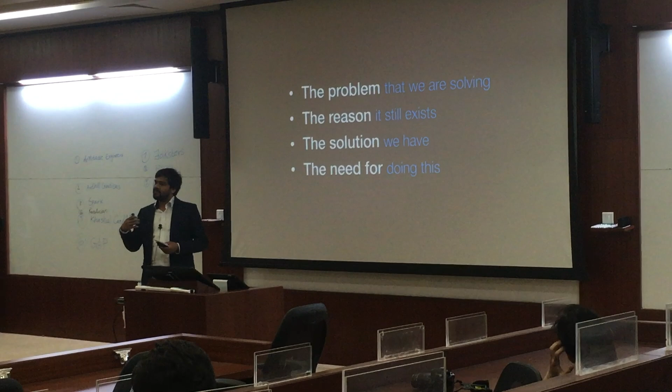So today I'm here to discuss water issues in India and how we are trying to solve it. I'll divide this into 4 sections: the problem that exists and what exactly we are trying to solve, the reason for it to exist and why hasn't anyone else solved it before, the solution that we have, and the need for doing this, and why don't we make an internet firm instead of doing something like this.

So let's start with the problem and why is it this bad. The first category of people we are trying to reach is the kind who don't have access to piped water itself. We take water for granted. Developed countries take pure water for granted. But there's a very large section of India, as much as 1/3 to 2/3 of the rural population, who don't have access to water. They have to go to regular ponds or rivers, which isn't very clean, and which obviously causes diseases. There are a lot of mineral issues, and you have to walk a long distance to get that water.

A lot of times it's students and children who, instead of going to school, basically try to get water, which isn't very cool. This results in a lot of deaths. A lot of children die out of dehydration, because of minerals, or out of diarrhea, which is a very curable disease, but a lot of people get it because of waterborne diseases.

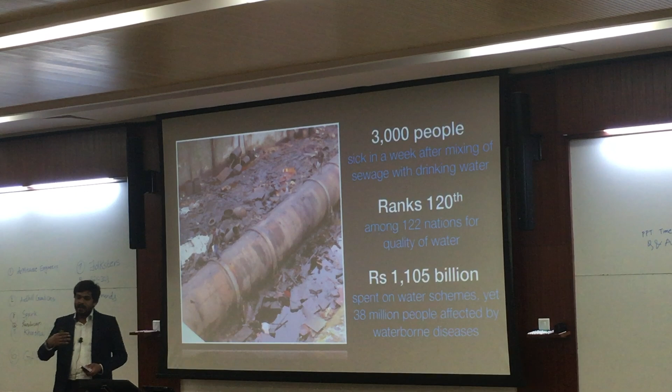But even beyond that, even people like us who have piped water, we also have a problem. If you've ever been to IIT Bombay, there's a pipeline that goes right next to the boys' hostel. If you go there, you can see a lot of cracks on it. There's a lot of sewage water that seeps into the drinking water. And this is not a rare issue, this is a very big problem.

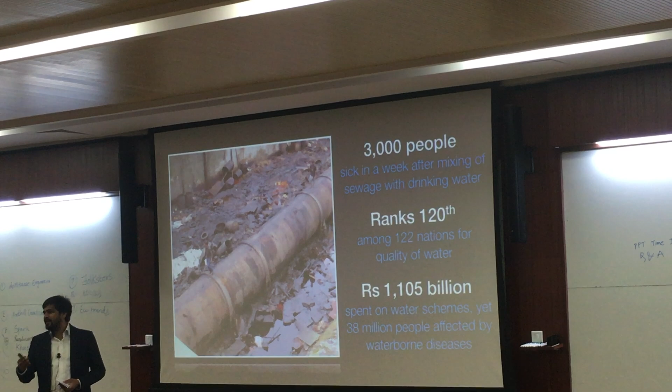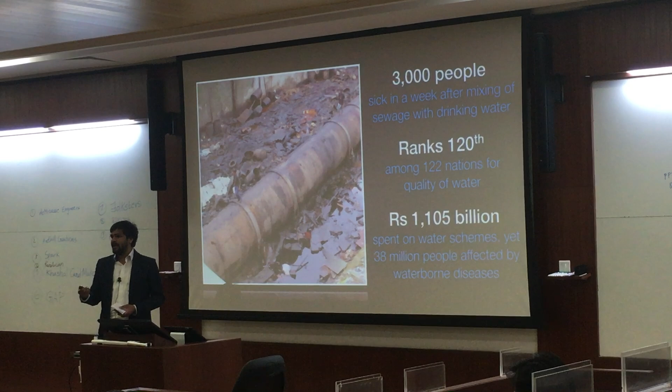In February this year, in Noida, about 3,000 people suddenly fell ill within a week, including children. This was because their drinking water was apparently being mixed with sewage water, and they were forced to drink it for a month. So that is a big problem. Even though we've spent so much money on these kinds of issues, this has existed for many decades now, which is quite shameful.

The third category of people we are focusing on is the drought-affected areas in Maharashtra, in the Latur area, and in Andhra. This is the primary go-to area where we want to start, because Latur, for example, doesn't have water even though it has pipes. That is such a big problem. 29% of the reservoirs don't have water. So that is a big problem.

The reason for this is basically mismanagement. Delhi has the Yamuna and stuff, so there is availability of water. India is very low in availability.

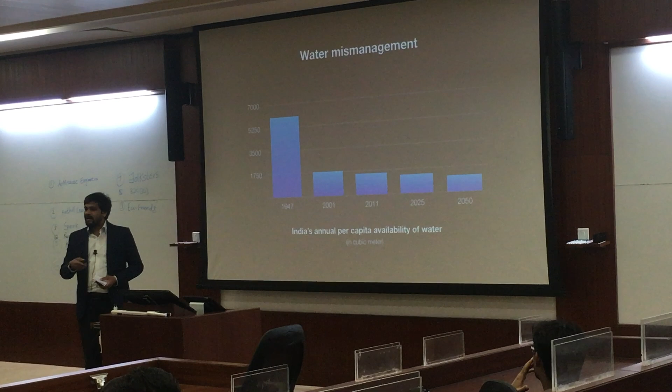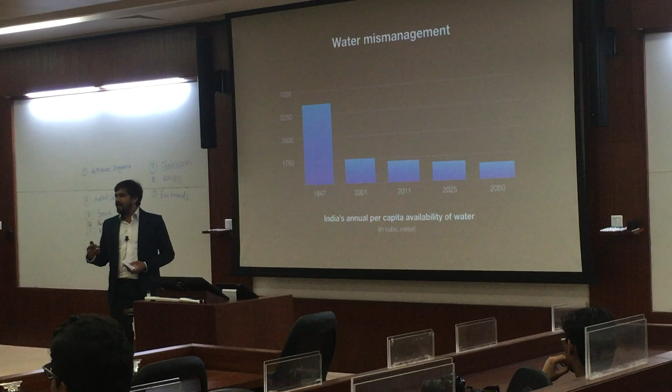After independence, we gave free electricity to farmers, and they started depleting the groundwater very quickly. So unlike other countries, this has gone down, and it's going down very rapidly, which is a bad situation. If we don't have enough water per capita, then obviously it's not a good situation to be in.

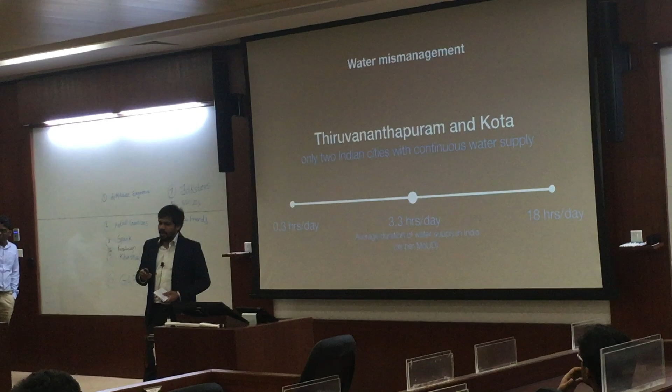In India, there are only 2 cities which have 24/7 water supply. Others, we know, don't get 24/7 - we have only a few hours. In Delhi, for example, there are places where you get water for only 3 hours a day. So we would like to see water being available 24/7.

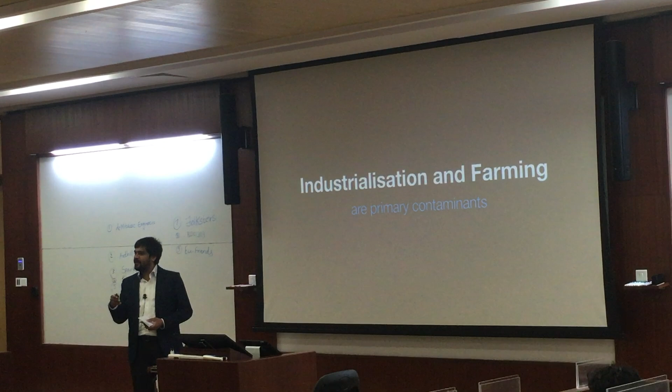Another main reason is industrialization and farming. In Delhi, for example, we get a lot of our water from the Yamuna, which is basically black and you really can't drink it. We have another source, the river that comes through Panipat. Unfortunately, there's a dye industry and a lot of clothing industry in Panipat, and they often discharge dye into the water, which renders the drinking supply of Delhi non-existent. So that is a big problem.

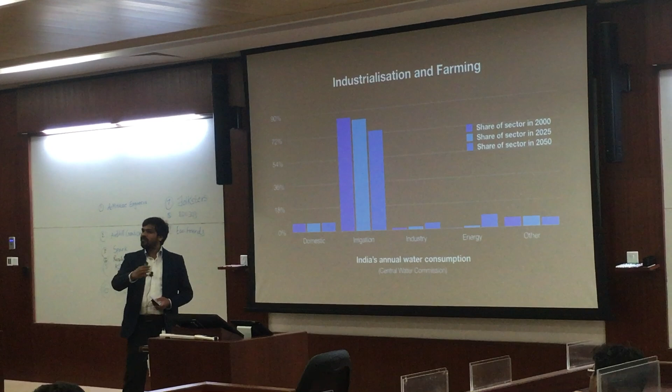As you can see, irrigation takes a lot of water. The second problem is thermal power stations. They use a lot of water, and usually they don't have a meter, so they end up using a lot of water unnecessarily, and this reduces the available water that consumers would have. We need to change that also.

We ourselves are a problem. We dump a lot of dirt in the water. Dead bodies are prohibited, and still we look for other means to dump those.

Then another problem is mafia. For example, in Delhi we pay at least 2x the price just for daily use of water, because we don't get water - we have to go to these tankers or other people. These people go at night and use dams or wells or whatever it be, and they take water out from there and sell it in the daytime. This also destroys the groundwater, so that is a bad idea. If you have enough water, then we can probably do a better job of controlling the mafia.

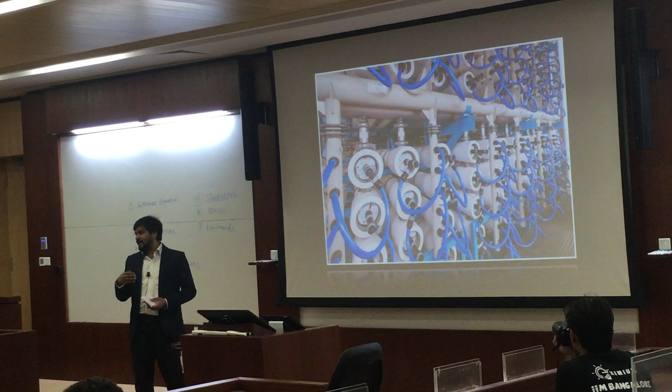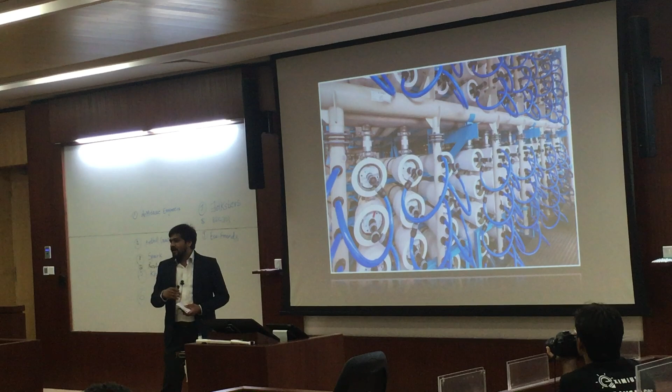So there are enough solutions. We could desalinate - use desalination plants, like Israel which is the biggest one. There's one coming up in California where we take seawater and remove the salt out of it. But that is a problem - it uses a lot of energy and a lot of electricity, so that's a bad idea. You can't produce a lot of water that way, and the biggest challenge is not every place in the world has seawater access, so you need to solve that. Delhi, for example, will not be able to solve that.

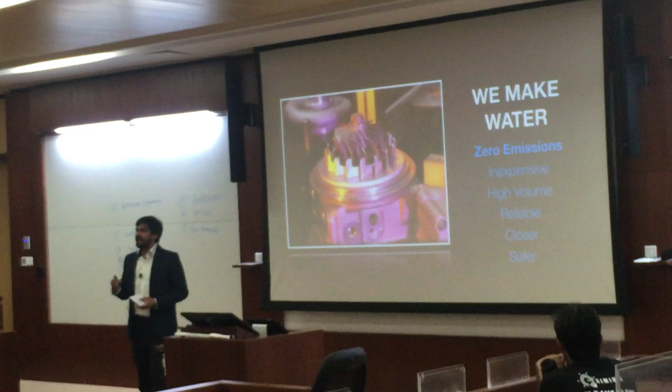So this is where we come in, where we solve this exact problem. We produce water using processes that have zero emissions. We do not use electricity from the grid, for example, and we do not burn fossil fuels, so it is a completely zero emission process. It is inexpensive - we can be as cheap as tap water. We don't have to be very expensive like Bisleri or any of that.

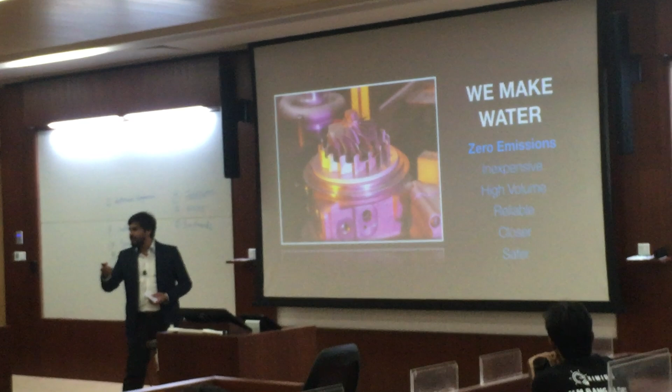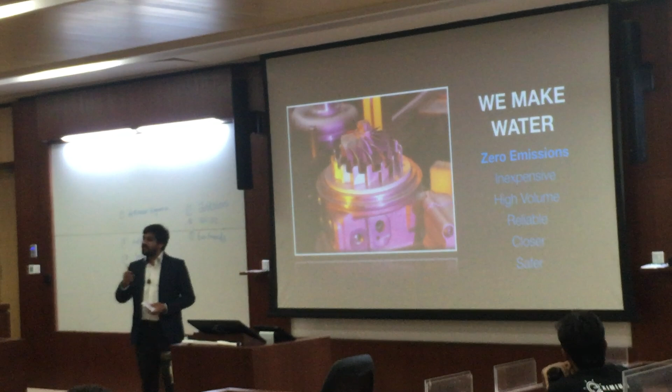If you go to Latur, you'll see a lot of these Bisleri bottles all around. These are from secondary markets basically - they refill those bottles and sell them, so that is a bad idea. We can generate at very high volumes, and it is reliable and closer to the consumers. So it reduces contamination, reduces the infrastructure cost that needs to be there, and it is safer.

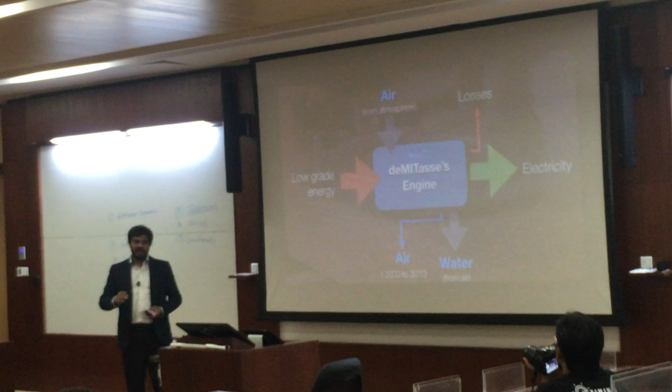So this is how we make it. We have an engine basically, and this is how it operates. This is basically how it does it. The engine that you just saw is our engine that we use.

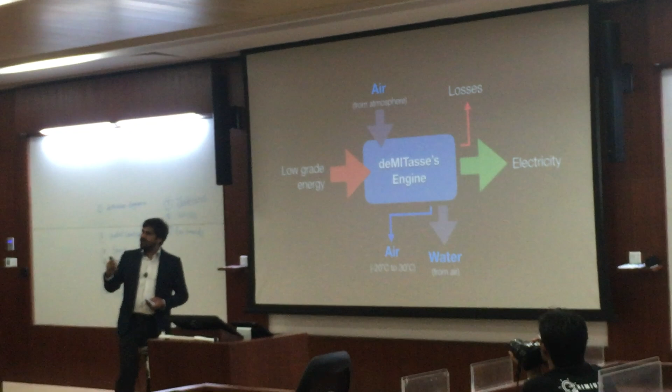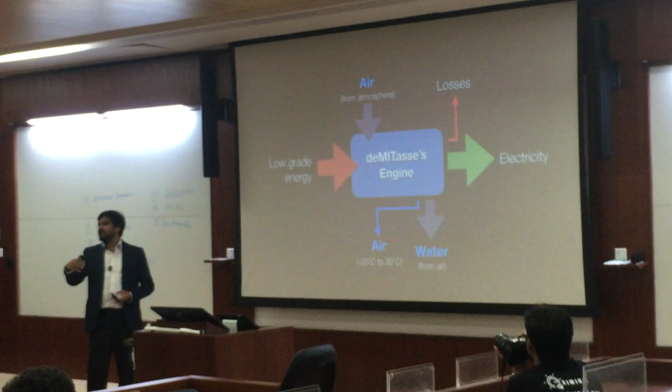We use low-grade heat from sources like thermal power plants, hot water, a restaurant's exhaust, or even vehicle exhaust. We have a special thermodynamic cycle, similar to the Rankine cycle, and it generally produces electricity - we can run a turbine which produces electricity. In a different mode of operation, we can produce less electricity, and the byproduct of this whole thermodynamic process is water. So we can change the whole dynamics and produce more water and almost negligible electricity.

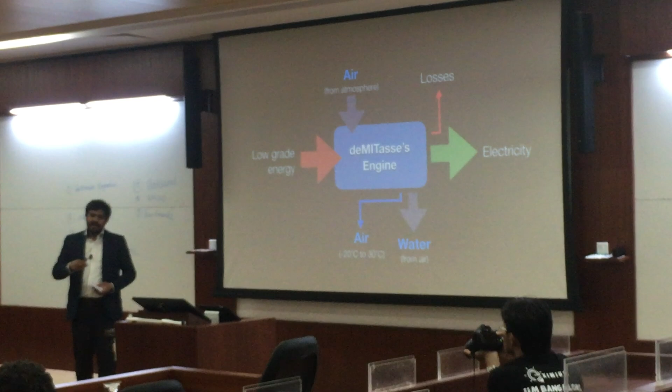We had started this as a rural electrification program, so this is one mode of operation. The other byproduct is cold air. If this is in a rural area, for example, we can connect this to a silo and produce cold storage systems at very cheap rates. And this is the turbine, the rotor that produces this.

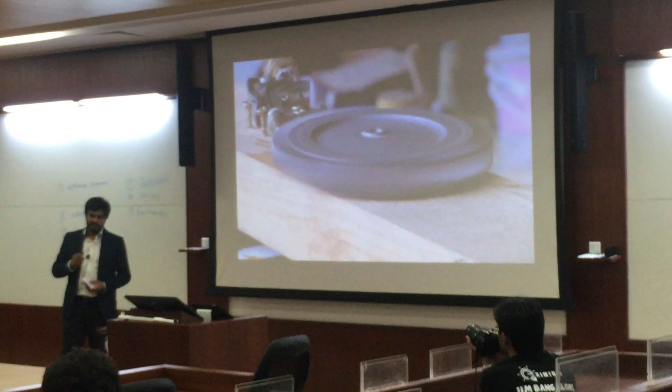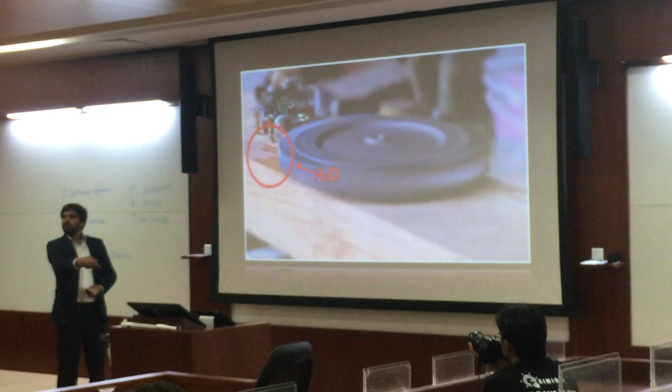So if you see, this is the water being produced. This does not have a canister - turbines have perfect casings at some microns distance. So that would produce a lot of water, and a lot of water is being spent into the atmosphere. This would produce a lot more water than you can see right now.

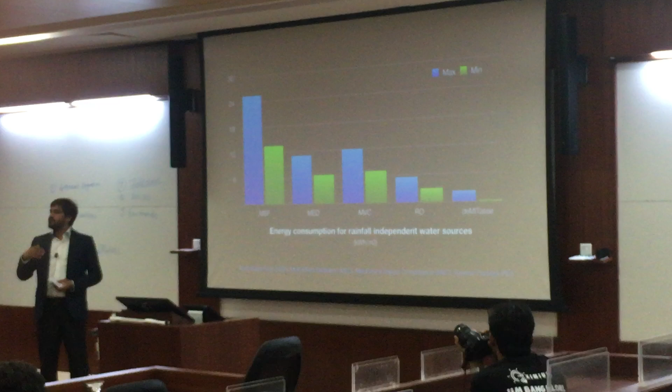And this is the energy consumption. Generally, you spend a lot of energy to produce water. If it's not from a freshwater system like a lake or a river, we consume very little energy. We can even use solar power - we can just connect 4 solar panels, for example, and generate water, so there's no cost of energy. We don't need a source of water either, like lakes or anything, since we use humidity from air to generate water.

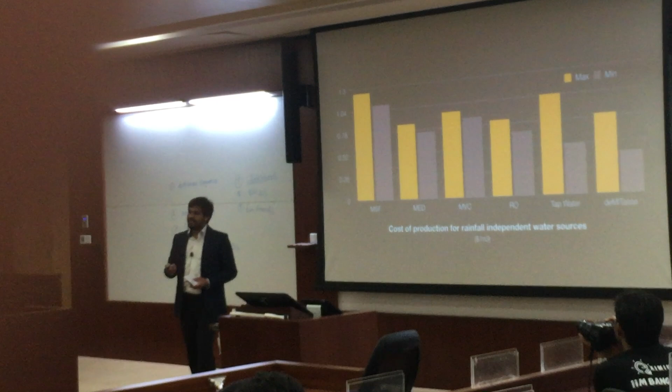We cool it down and use deliquescent materials to pull water out of it. So this is there, and we are also very cheap to generate water. We are not dependent on other quantities. We do not have logistics. We do not have energy considerations, and we don't need a continuous supply of water. So that makes us very inexpensive.

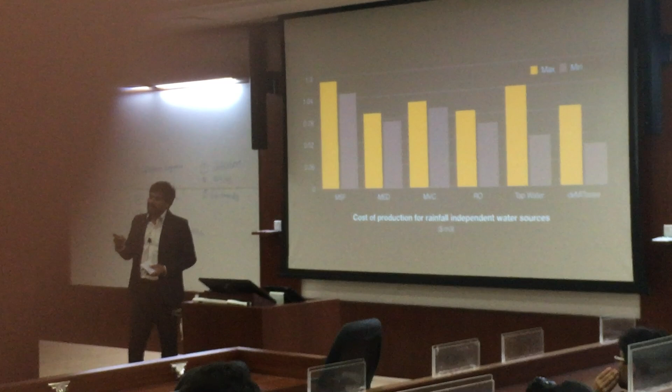At MIT, there's been research for artificial photosynthesis that uses a ruthenium core. Ruthenium is very expensive; beyond lab scale, that's not very possible. We use pure aluminium to build our engines, so that basically makes it cheap. It has a long lifeline of 20 plus years. So maintenance is cheap, and in the longer run, it comes to be cheaper than tap water.

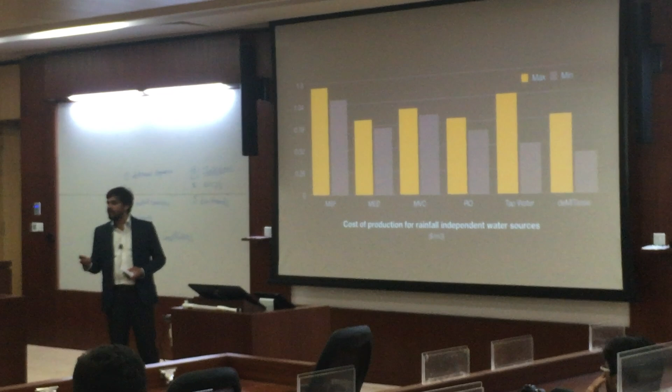And why are we doing this? There's a Japanese concept called ikigai, which means everyone comes on earth for a certain purpose. And we think this is our purpose, to solve the bigger problems that the people on earth face. And probably your ikigai is to help people like us do something that we want.

Questions, please. Yeah.

I'm still not clear on your product. Is it going to be a mini plant, or is it going to be a system that you install in a console? And what is the generation capacity going to be like? What speed can you generate? How much can you serve out of the unit? What's the unit and what is the capacity?

So we started out as an energy company where we generate electricity, so we see ourselves in terms of kilowatt hours capacity. We can generate as much as 20,000 liters per day on our prototype right now. But as with DG sets, you see them in your home and at multi-megawatt level, so we can upgrade them depending on the need. We are not for homes or offices, probably a little over that. We can go right up to the plant level, where our aim is to generate water for villages or communities, but not for homes. That would be very expensive for us.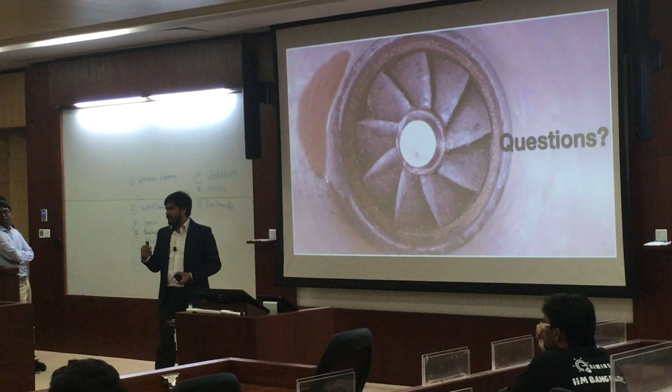We cool it so much, at minus 55 degrees, that water comes out. That is a parasitic loss we don't want when generating electricity. But instead of generating electricity, we can cool it down to minus 55 degrees, which generates water. So far we've generated 20,000 liters per day. We were just testing it; this is not the final product. We know we can generate much more than that.

The only condition is we need to check the mass flow rate of air. The production depends only on the mass flow of air. And like DG sets, we can scale it up, so that shouldn't be much of a problem. Scaling down might be a problem. We wouldn't want to produce water for one home.

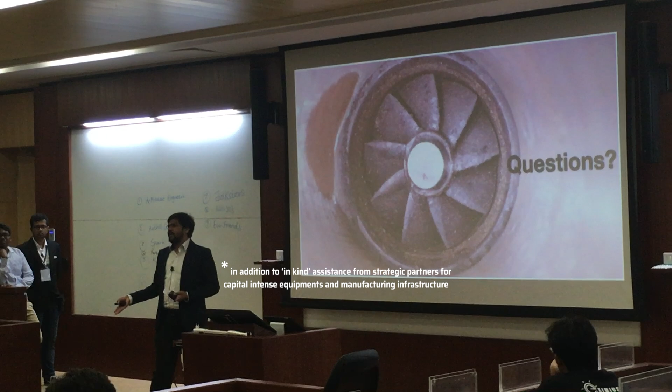So what's the operating cost like to generate 20,000? Right now, for a month, we've been spending about 2,000 rupees. For operating, we use solar; there's nothing else that we require. The 2,000 rupees is basically the working fluid that we have to buy, and the solar trough, 1 meter square. We built this for 40,000 rupees. If we have a production of more than 100 engines, we can definitely produce it at about 30,000 or less.

40,000 rupees investment and 20,000 liters per day? Yes. This is distillation grade water. We don't have any microbes in it, and we don't have the mineral issues that water generally has. This is pure water basically.

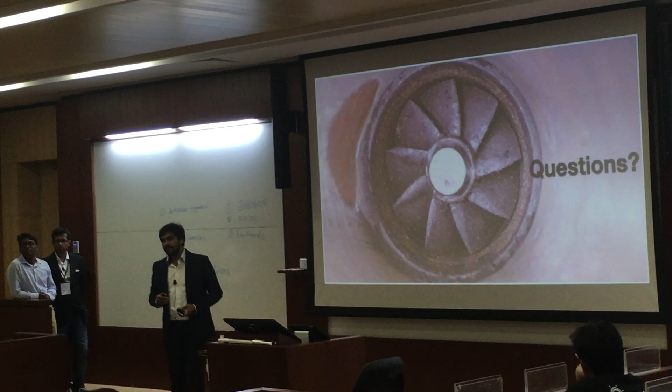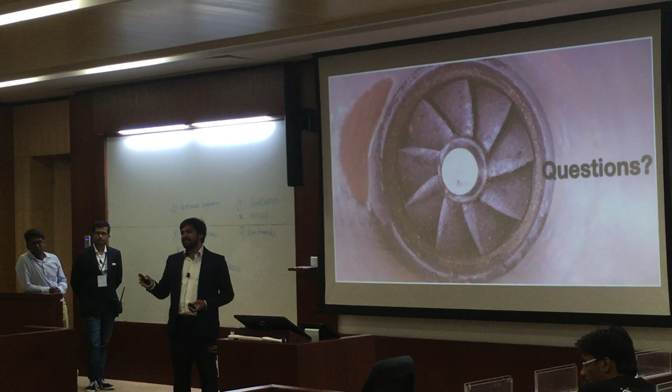How does the motor run? Okay. So the air is the regular atmospheric air. We don't process it, we don't do anything to it, and theoretically we can go for as much as 10% humidity. Because we are going to minus 55, we basically produce ice and not just water. So the humidity shouldn't be so much of a problem.

Even in sub-Saharan Africa, there's a company which uses a deliquescent material, and the billboards that you see on the roads have a meter-long tube full of that material, and that produces water enough for those villages. So we are pretty much doing the same thing, but we are doing it at minus 55 degrees. So if they can give water to a village using that, we are sure we can do much better at whatever the humidity level is there. So that shouldn't be a problem.

If we were at say 4 or 5 degrees, then we would probably worry about the humidity. But at minus 55, humidity should not be a problem. And if you have a humidity level so low that we can't take it out, then we can't survive in that kind of environment either. So we probably wouldn't be working in that kind of situation anyway. So yeah, let me just.

Okay, so basically we use low grade heat. How the Rankine cycle works is you have a working fluid like water, you give it heat, and it converts into gas, superheated steam. That gas then drives the turbine. Similarly, we have a working fluid, a proprietary fluid which does not have carbon in it, and we heat it with low grade heat, anything above 2 degrees Celsius but below 130 degrees Celsius. This then superheats our gas.

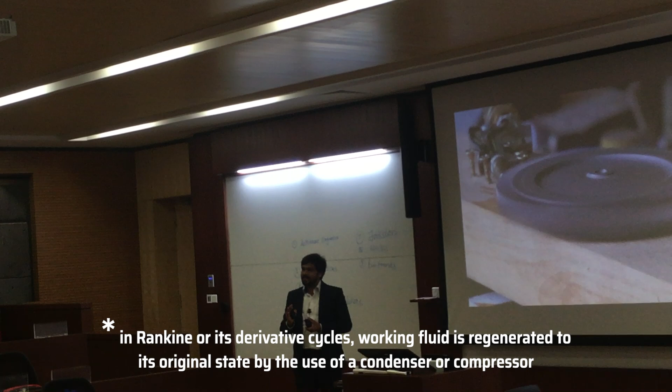In the Rankine cycle, the biggest issue anyone has is what do you do with the spent steam? Either you let it go into the atmosphere, which is spent water, and then you need a continuous flow of water, which is expensive. Or you can regenerate it by cooling it. For cooling it, you have to bring down the temperature and compress it. Compressing any gas is a very stupid thermodynamic process because a lot of heat goes out which you cannot use. So there's as much as 60 to 80% parasitic loss just because of that in today's thermal power plants. So instead of mechanically compressing it, we use electrocatalysts.

It basically uses electricity at about 2 volts with catalysts to convert the spent working fluid back into the liquid. Obviously it takes energy, but much less than mechanical compression. I think you'll probably understand this, being a chemical engineer. So this is a continuous process, and this is one of our key proprietaries. So yes, we have 3 prototypes ready. We are making our 4th one right now.

Not yet, but we are working. We are also working with Indus Towers to power the telecom towers. So yeah. Right. So we haven't tried the solar yet, we've just started. The 20,000 was from solar. At our factory we are also trying to use heat recovery. They have a very small furnace, so we probably would want to try that. The 4th prototype that we are building is going to be using heat recovery.

We are also in talks with the Indraprastha power plants. They have big gas turbines in Delhi. Since they don't have access to natural gas, they've been operating at 1/6 of their operational capacity. So their solar division is sort of interested. We've been in talks with them for a month and a half now. Yes.